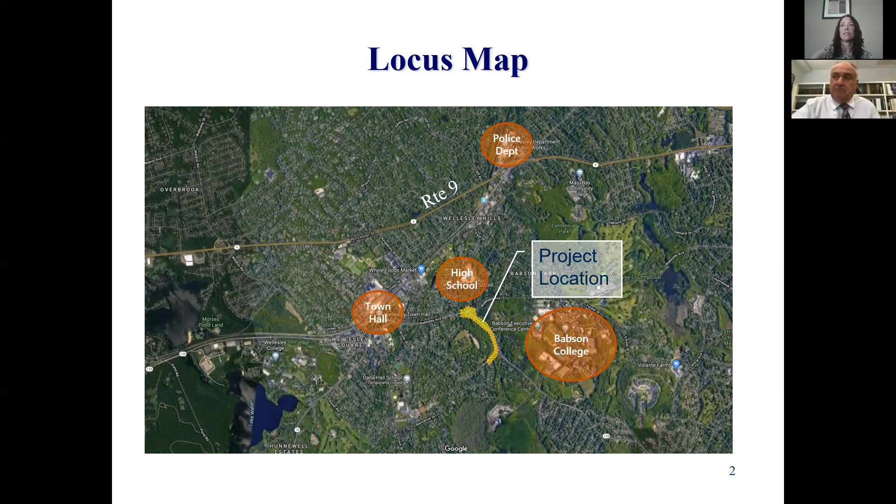The existing intersection is generally circular in nature, but has confusing traffic control that has led to safety issues that Lieutenant Shosted mentioned in his introduction. In 2017, the town hired VHB to study the intersection operations and safety conditions at this location and develop conceptual improvements to address the issues.

The Wellesley Police Department identified this location as a problematic location and engaged the services of VHB to study the intersection. The study identified over 90 crashes over 6 years, mostly related to the unexpected stop control within the circulating portion of the intersection. This also leads to queuing and delays from the stop control on Wellesley Ave. There is also confusion for drivers regarding the vehicular right-of-way at the Wellesley Avenue at Seaver Street junction.

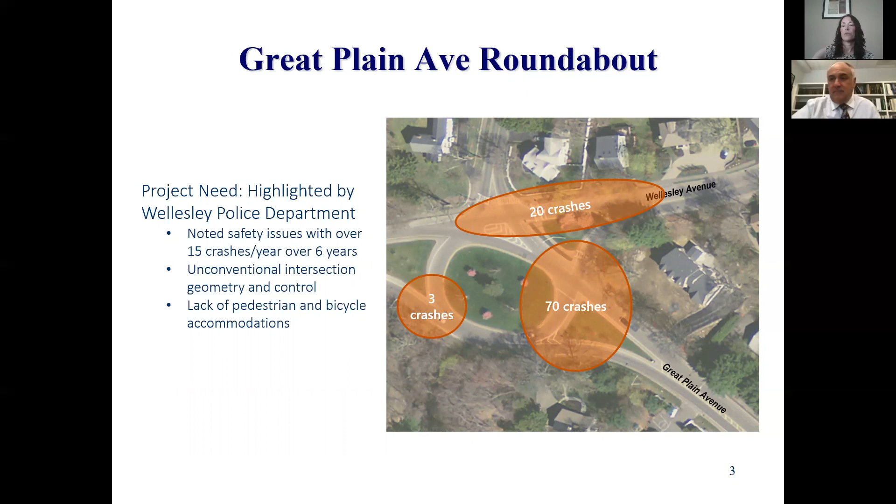These findings, along with 2 conceptual improvement options, were presented at multiple public meetings in 2018. The 2 options presented were a traffic signal and a roundabout concept. The traffic signal concept consolidates the multiple intersections into a single 4-legged intersection controlled by a traffic signal. This all works within the existing right-of-way.

The traffic signal concept would provide improved control pedestrian accommodations, but has substantial impact to the central landscape island. Traffic signal design also resulted in increased delays on Wellesley Avenue eastbound and Great Plain Ave northbound.

The roundabout concept retains much of the existing traffic circle and works within the existing right-of-way. The concept provides improved control pedestrian and bicycle accommodations throughout the intersection. The major difference between this design and the existing conditions is that all entering vehicles must yield to circulating vehicles, which is unlike the unexpected stop today.

Each of the 4 legs are also incorporated into the circle. Seaver Street and Wellesley Ave were brought into the circle. The roundabout will reduce speeds and clarify vehicle right-of-way, both contributing to improved safety. This concept would not have signal equipment to install, power, or maintain. Statistics have also shown that roundabout intersections typically operate safer than signalized locations.

Based on the study and recommendations and overwhelming support from the public meetings, the roundabout option was selected as the preferred option to move forward with the design. During the public outreach, the idea of the sidewalk and bike lanes connecting to the other neighborhoods was also expressed, as Lieutenant Shosted mentioned earlier.

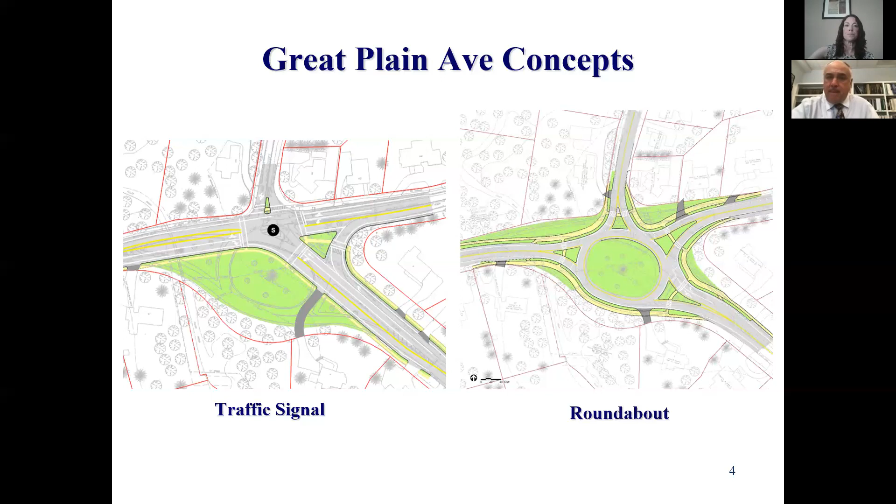This is a simulation of the roundabout design that was presented to the public in 2018. It shows how all the legs would be brought into the circle and that vehicles entering must yield to vehicles already in the roundabout.

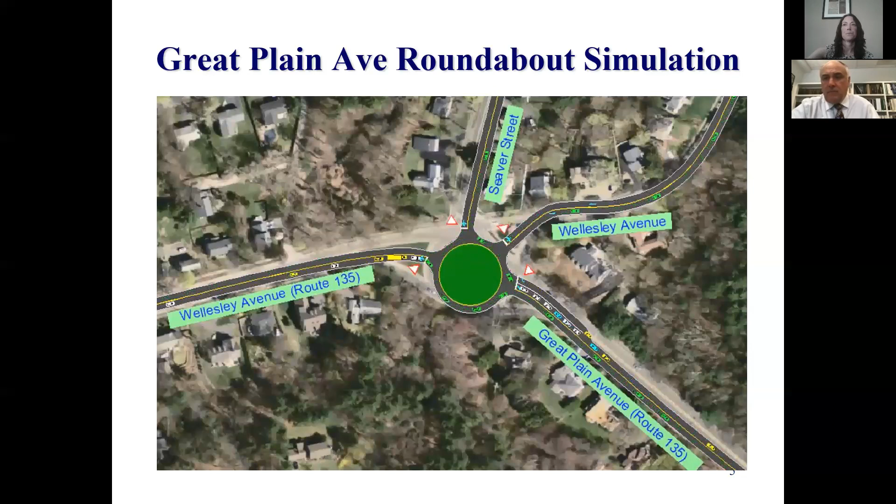Since the concept, we've refined the geometric design and prepared plans that are ready for construction. I'll touch on a few highlights regarding improvements for pedestrians and bicyclists.

There are crosswalks at all 4 of the intersecting legs, with ADA compliant wheelchair ramps, and an 8-foot shared use path all around the circle. We're replacing many landscaping elements and trees that were removed for this new design, and working with the town to give the intersection adequate lighting for people to cross safely at night.

Project highlights: this improves the safety issues that were identified earlier for the unconventional intersection geometry, and there are also some minor drainage improvements.

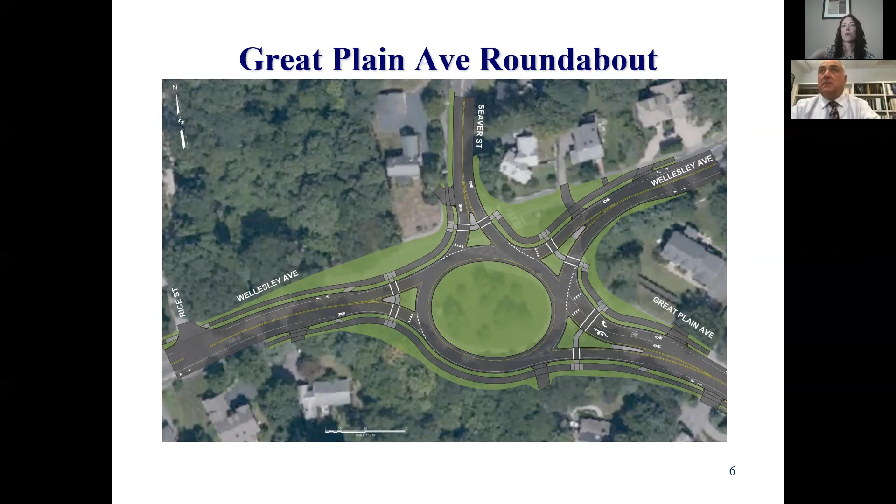Great Plain Ave sidewalk. As part of the concept stage that moved forward, it was evident that sidewalk was requested all the way through to Brook Street, so we incorporated this into the design.

The 8-foot shared use path will split into a 5-foot on-road bike lane and a 5-foot sidewalk on each side of the roadway. This includes complete street standards incorporated into the design, which is eligible, and Dave will talk about that in a little bit.

There are also 5-foot bike lanes on each side of the road, a vital connection to all the neighborhoods. It is very rare to find a project that can improve safety, provide complete streets for all users, and new sidewalk connections while reducing the overall impervious area. We gave this road a road diet.

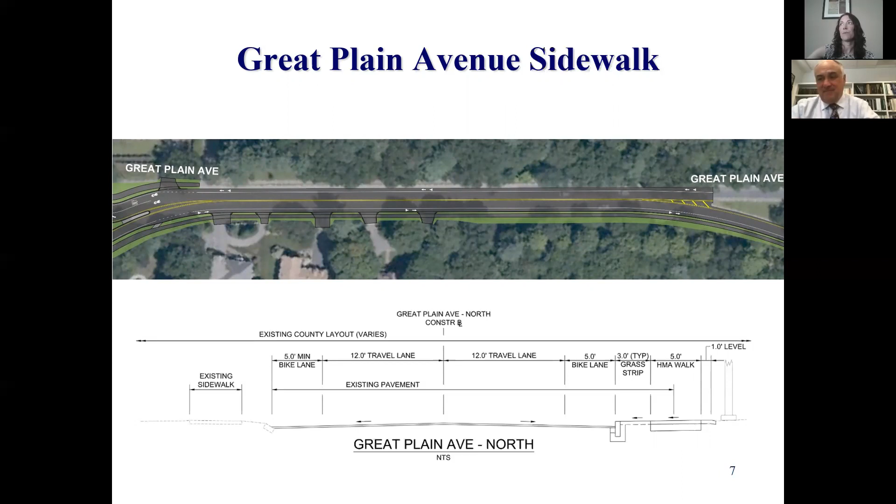The Brook Street sidewalk. The proposed sidewalks on Great Plain Ave were extended to complete a loop between Great Plain and Fuller Brook Road. This provides a connection from the schools to the Fuller Brook neighborhood.

We also enlarged the island on Brook Street, which will be able to provide a walkway, making for a safer crossing of Brook Street.

We were able to keep the tree at this location also. The reconfigured island will help channelize traffic on Great Plain Ave, which should allow for better merging conditions from Brook Street.

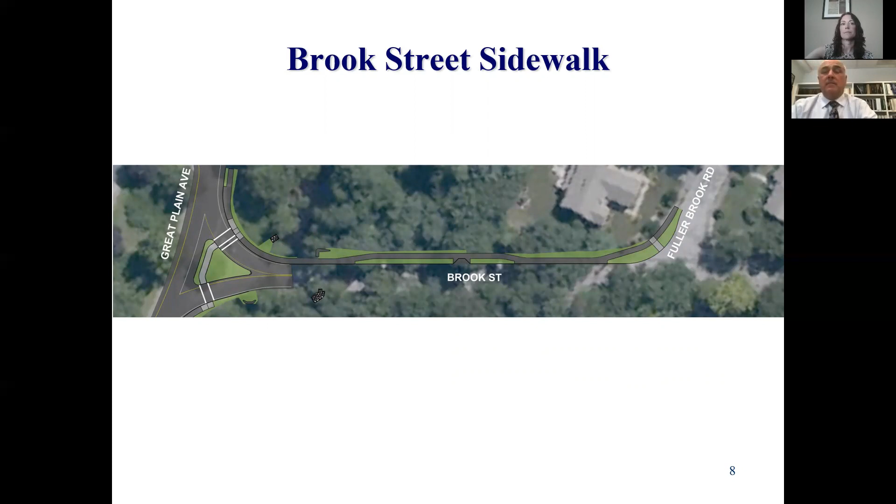And with that, I will hand it over to Dave.

Great, thank you for that, Tracy. This is Dave Hickey, your town engineer. We're nearing the conclusion of this presentation, but importantly, we need to talk about budget.

The DPW originally estimated this budget at $1.75 million. However, as the plans advanced, we concluded that this budget would be insufficient to address all of the needs. In particular, costs associated with drainage after we assessed it, with safe lighting, and with compliance goals in the Complete Streets program that Tracy talked about were all undervalued in our original budget.

In the end, this project requires about $200,000 in drainage improvements, about $140,000 in street lighting necessitated by the new alignment, about $150,000 in new multi-use paths, and $30,000 in signs, striping, and other pavement markings to make the project safe for all users.

Please note that the lights out there are not being increased in number for this project, and the LED fixtures currently used will also be used in this design.

The new lighting design is really about carefully focusing the lights so that vehicles entering the intersection can clearly see the new alignment, and, as Tracy mentioned, pedestrian or bike users in the crosswalk are adequately lit.

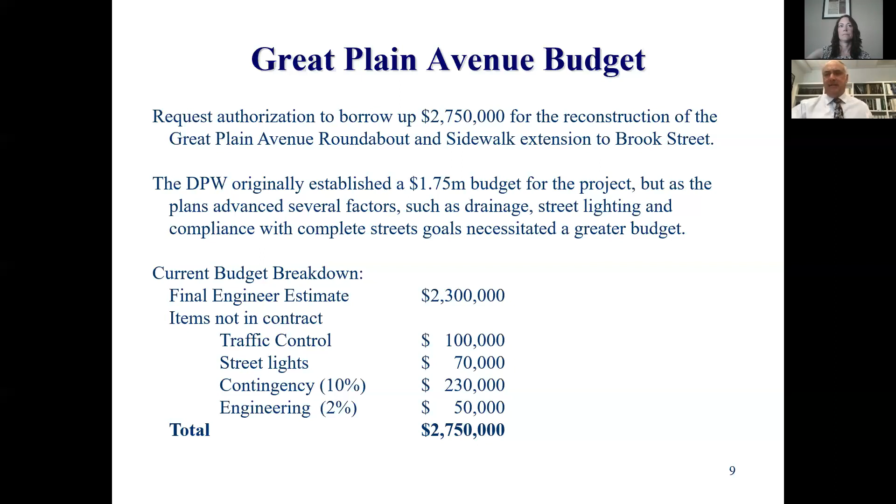With the later town meeting schedule, the anticipated project start will also be delayed, pushing some phases of the work beyond our traditional summertime construction season. It is our expectation that work will start in late July or early August and take about 2 to 3 months to complete, while we normally try to limit impacts and duration of road construction to be done prior to the start of school, it's unavoidable for this project.

However, the project specifications will require that roads remain open and passable, other than brief periods such as utility crossings or during the final pavement operation. Further, a detailed traffic management plan that outlines the phasing of the realigning of the roundabout must be provided by the contractor and approved by the town.

While it's not ideal that the construction will go into the fall, we do hope that with the reduced traffic we're seeing in this COVID phase, we have an opportunity that we otherwise might not have to continue to work in the fall and still not have significant impacts on traffic congestion. Clearly, the project will have to coordinate closely with public safety, schools, abutters, and the general public to manage the construction.

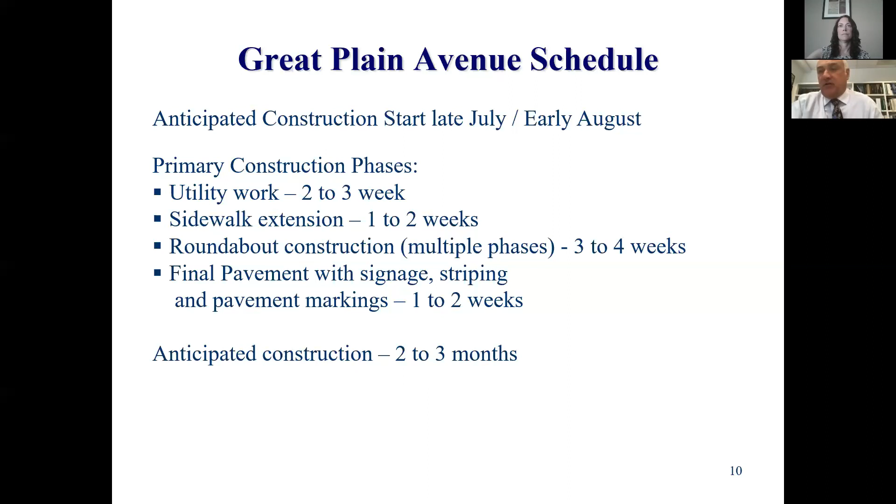Finally, as Scott and Tracy and I put this video together, we tried to capture the process that the town's been through over the last 3 or so years. We wanted to share with you the key decisions and important project details. However, we recognize that the format of this presentation doesn't afford normal questions and answers that typically would be allowed, so we wanted to at least list a few common questions associated with construction in general.

So I'll ask a couple of questions of Dave. What are the hours of work and how might this project affect the traffic patterns? The project specifications dictate traditional construction hours of 7 to 5, Monday through Friday, with occasional Saturday work.

The project documents also allow Sunday and night work, but that will require special permission and will be shared with the public in advance. Nights and weekends really are not expected for the project, other than final pavement or during key lane shifts between the new and the old alignment. The existing traffic patterns will be maintained during the project to the extent possible.

Does the project anticipate more pedestrian and bicycle uses and future changes to Great Plain Ave? We certainly hope this will be the case, and it was a comment we heard both during the public hearings for this project and our Complete Streets project. So we've designed this with the idea that hopefully it will begin a larger discussion about pedestrian corridors in Wellesley, safe routes to school, and additional bike lanes, both in this area and in other areas. We believe the infrastructure installed with this project is easily scaled up and linked to broader initiatives.

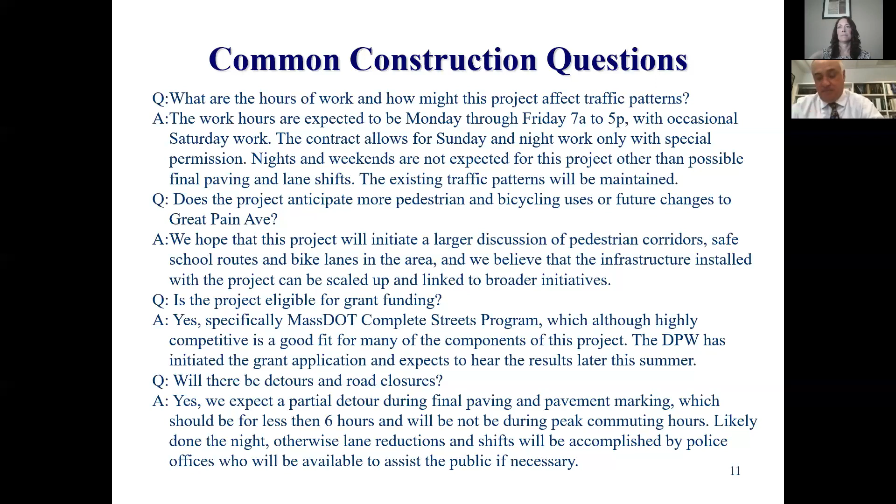So as we close this presentation, we want to thank you for your consideration of what we see as a really important safety improvement project that evolved and included the feedback of neighbors and others, as well as a real unique opportunity to expand the options for walkers and riders, and to better link a section of the town that is not currently connected. And to do all that, as Tracy mentioned, in a way that reduces imperviousness and improves the quality of stormwater. We thank you very much and look forward to any questions.